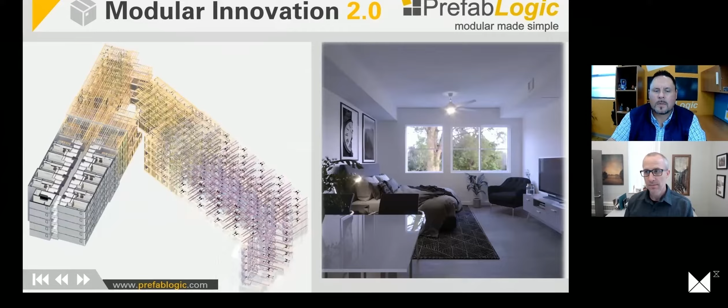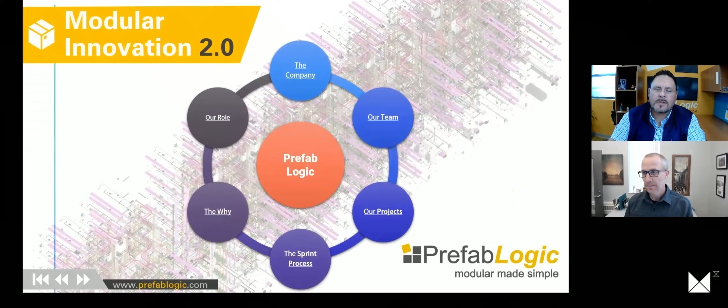So modular innovation for us, for an intro, we're going to talk a little bit about our company today, our team, our projects, the type of product that we heavily focus on, our proprietary sprint process, the why we do what we do, and how we play a role in the outcomes.

Our mission as a company really is defined into four very basic things. It's compression of time, the amount of time that projects rest in the pre-construction phase. It's reducing project expense, both during the pre-construction phase, during the manufacturing process, as well as that modular integration into the site. We'll talk a little bit today about how we accomplish that.

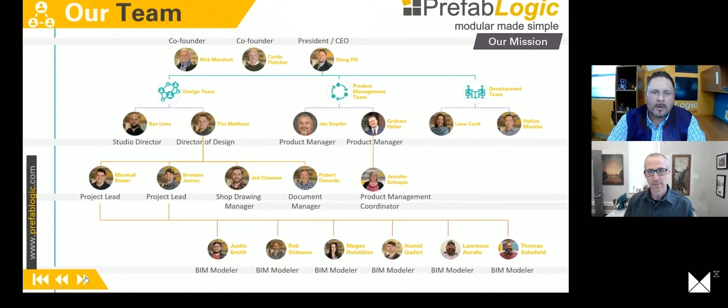Also to deliver highly coordinated products to our manufacturing partners and our general contracting clients, as well as to drive the modular industry forward through technology creation and innovation, some of which we'll see today. A little bit about our team. As I mentioned, Rick Murdock and Curtis Fletcher are co-founders. Myself, Doug Pill, I run the design team, product management team, and the development teams.

In terms of types of projects that we work on, it could be classified from a high level as high density products, whether that be type 3 or type 5, of course, wood frame product, but in the affordable housing space, market rate housing, senior assisted living, workforce housing, student housing, and also hospitality. Up into the pandemic, we had quite a number of hospitality products that we'd worked upon, but due to COVID, that's slowed down a little bit. But I think we see some headwinds on the horizon for us in that particular area.

So one of the things that we're going to focus on today is our proprietary sprint model process. Historically, it was not uncommon for projects to rest in the pre-construction phase in the modular industry for 12, 15, 18, 20 months, maybe even longer. And even with that time frame, the product delivered to the manufacturing partner wasn't optimal. It wasn't integrated or coordinated at the level it needed to be, which caused manufacturing inefficiencies, delays, and oftentimes product actually being built offline out in the yard. With our proprietary sprint process, we've eliminated that.

What we're looking at here is a very high level of our sprint process broken down by sprint by client. As you'll notice, the blue scopes across the top, that's the developer scope. That would encompass sprint 1 and sprint 3. Sprint 1 is really about getting the product designed and detailed from an architectural and specification perspective that allows us to define that line in the sand, which we'll see in just a few minutes, giving all stakeholders clarity on what's actually going to be built.

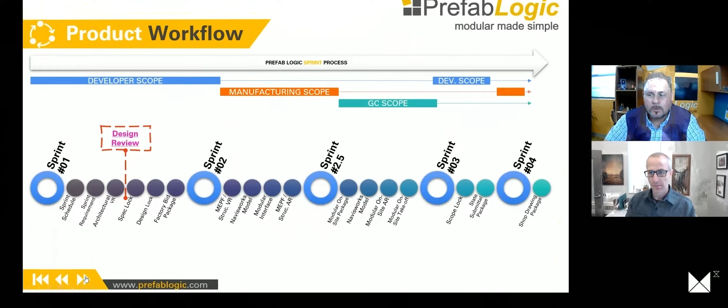Moving on into sprint 3, as I mentioned, that's the state submittals package, that's the development scope, and then sprint 4, wrapping up from a high level, that's the shop drawing development, production, and distribution package.

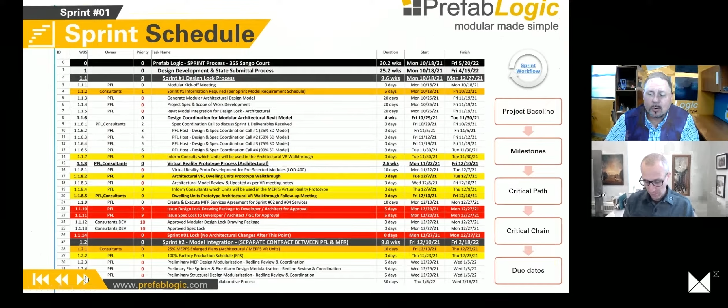And the accompanying document to this, which we produce for every project, is what we call our sprint model requirement schedule. And this is just a snapshot, high-level overview of it. But what this does by discipline, architect, developer, general contractor, manufacturer, PrefabLogic, structural engineer, all of these stakeholders that are involved in the pre-construction process, from the moment that we kick off a project, if we reference back to that 10/18 date, they'll know by sprint and by day what deliverables are due, and we drive to that process. And so PrefabLogic, not only are we the architect of record for everything modular, but our team actually drives through the sprint process for congruency, constructability, feasibility, all the way through, okay?

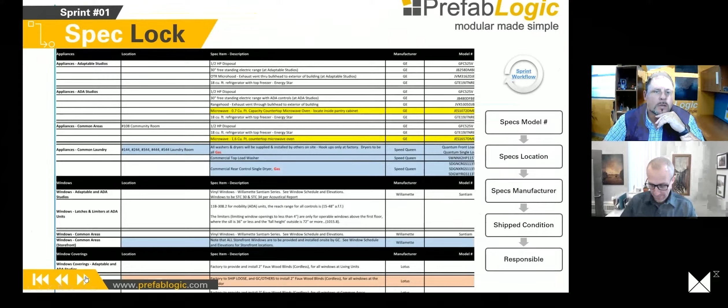Moving into, at the end of sprint one, we actually get to spec lock, and this is a very robust package that defines by room. There's some generalities in this particular document, but by room, whether that be a dwelling unit or a common area, boiler room, electrical room, low volt room, everything that's going to be purchased and installed in the modules in the manufacturing environment.

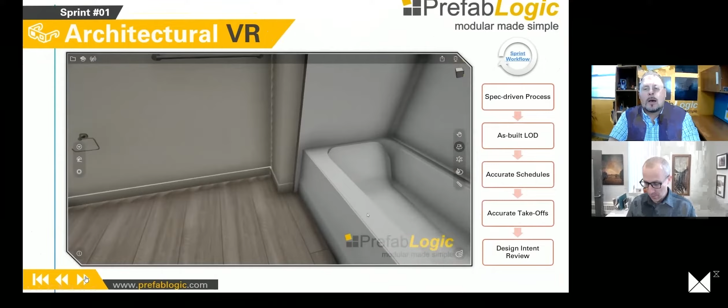Well, as we mentioned before, Ryan, we'll get to a point where roughly 5 weeks in, we will bring all those stakeholders together and give them a visual representation of our work product thus far. And I say this is a visual representation because the truth is, this is a very data-rich environment. Every component that you see modeled here is actually modeled to spec. There are no placeholders in this architectural model, meaning the faucet that you'll see there, the cabinets, the appliances, the receptacles, lighting, everything is actually modeled to spec.

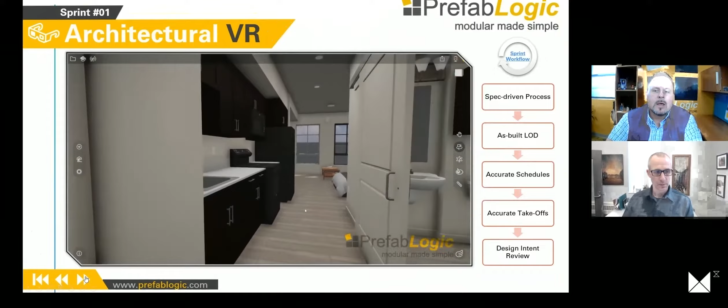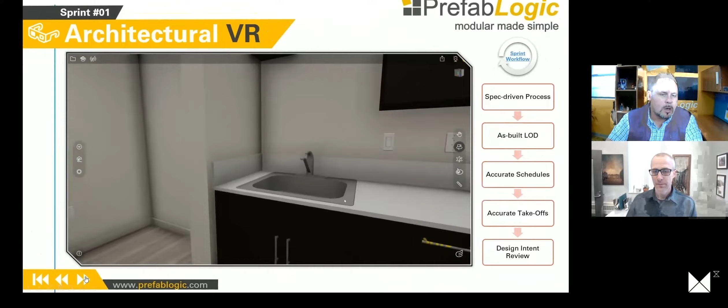And what that allows us to do is not only provide this very robust, comprehensive visual representation of what's going to happen, but it allows us to actually start extracting data very early on in this process for our manufacturing partners. An example, the door hardware, we'll know who the manufacturer is, what the model is, all of those data points, colors, that we can begin extracting literally, let's say 70 to 80 days into the project, so they can start getting ahead of that procurement cycle.

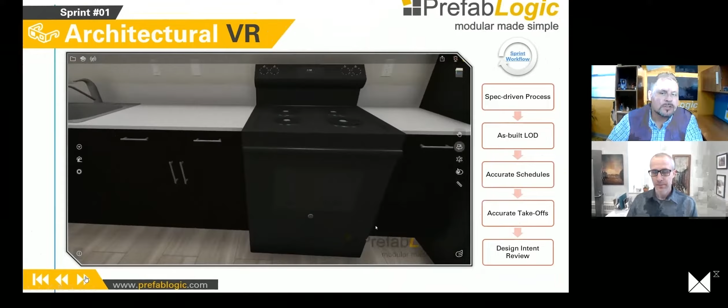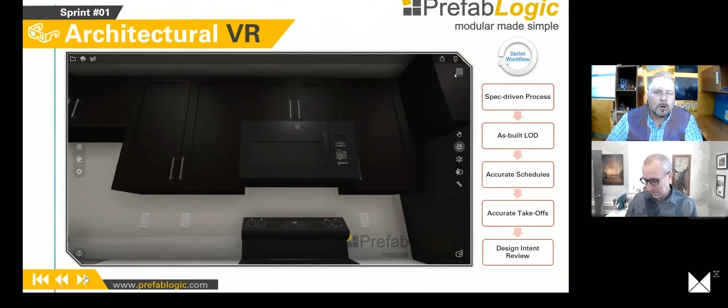Everybody knows procurement's a challenge for builders and modular manufacturers, but when you lay on top of it the supply chain issues that manufacturers and builders are facing today, the earlier we can get that information to them, the far better the project goes. And we're in a position today to be able to provide this information literally 80 days after we kick off a project.

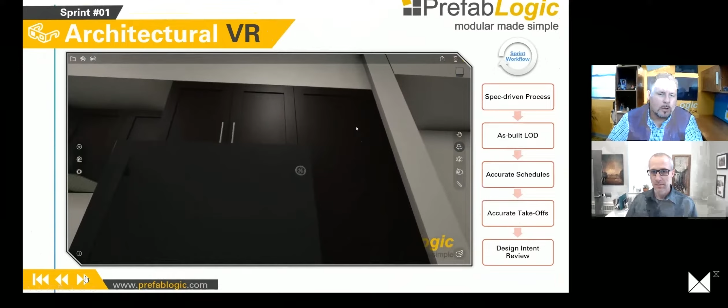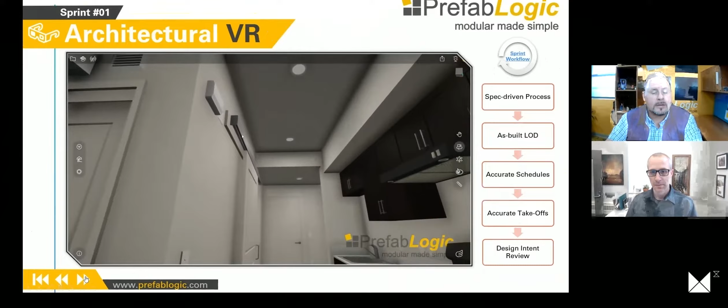So the intent for this originally was to give all the stakeholders the ability to make final changes before we proceed into sprint 2, because the sprint process is progressive. We don't go from line 7 in sprint 1 to line 8 until line 7 is done, because it ensures that we're all but completely eliminating rework and everybody's congruent in the status of the project. Does that make sense?

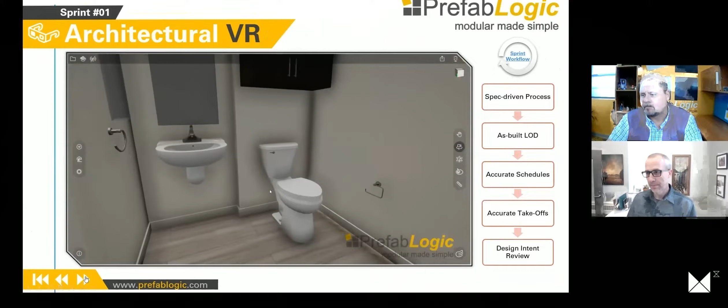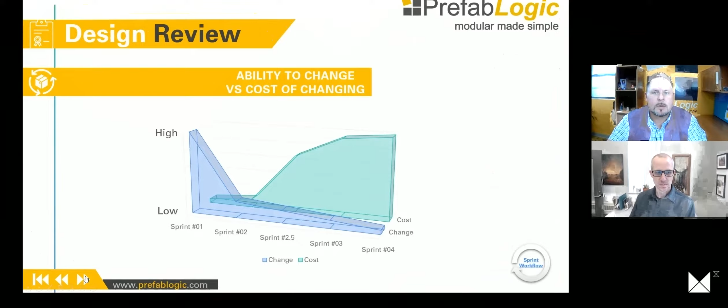At the end of the architectural review, we'll make any changes that have been made by the development client or the interior designer or the architect, and we'll produce a very robust deliverable. We call it our client approval package. And in this particular package, anything that has been designed, defined, or specified will be produced in this document. And it's roughly about 80 pages, depending on the project, but it'll provide overall 2D and 3D plan sets and enlarged 2D and 3D plans.

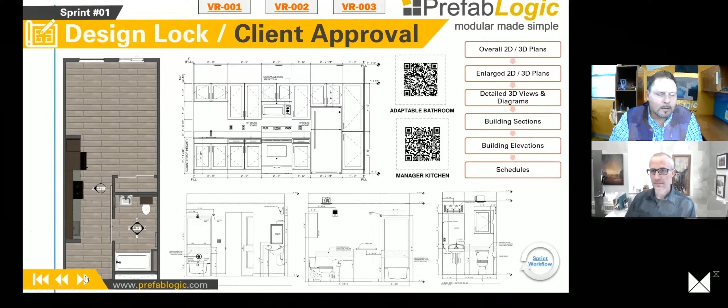You see the floor plan here on the left-hand side of this screen, the detailed 3D views and diagrams, cross-building sections, elevations, and schedules. One of the things that we had been requested to do by some of our clients is, as much as they appreciated the architectural virtual reality review that we do 45 to 50 days in from the time we kick off a project, they needed something memorialized that ancillary stakeholders could utilize, whether that be leasing agents or lenders or other investors that didn't have the ability to access the virtual reality environment.

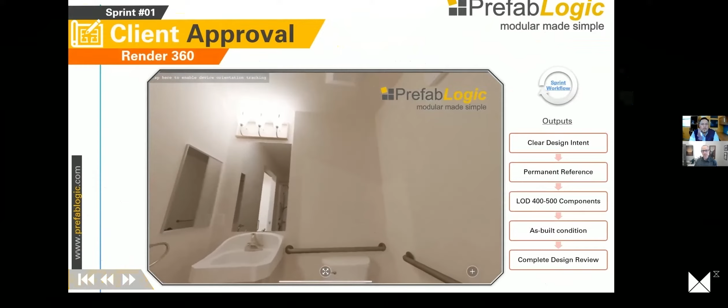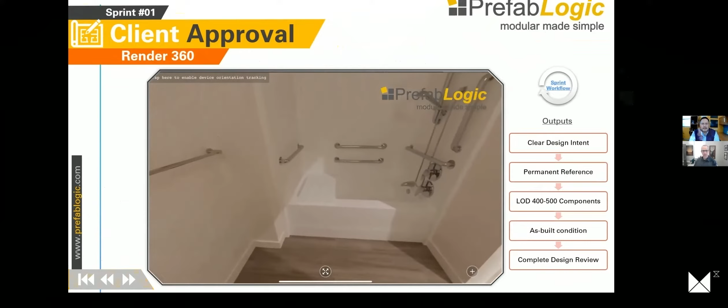And so we created an application that allowed us to provide that to them. And it's a Render 360. So anything that has an elevation in that particular building or in that dwelling unit, we provide Render 360s for those folks to actually leverage and utilize as a tool. Think about having a leasing agent on a particular project that can access this, 60 days in from the time that we kick off a project. Their leasing strategy changes. How they market this product changes.

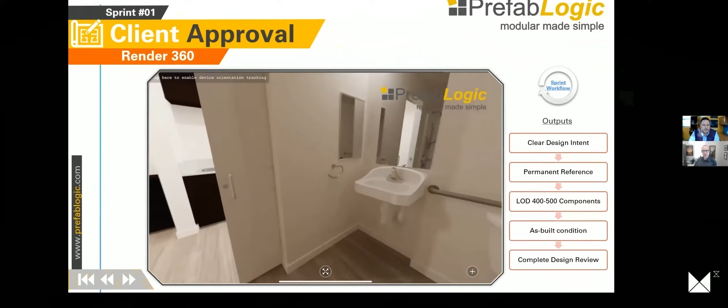Now, keep in mind, this is a static image. There's no data behind this environment here. It's all static, but it's 100% clear, accurate representation of what will be done, what those units will look like.

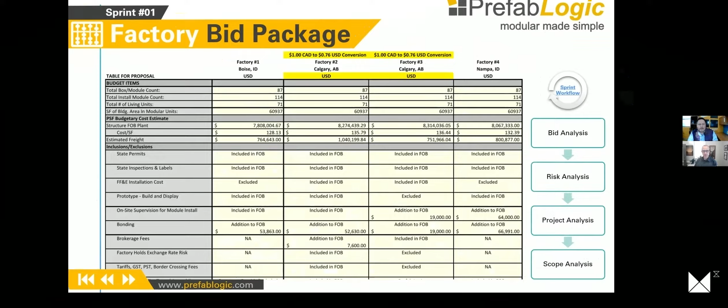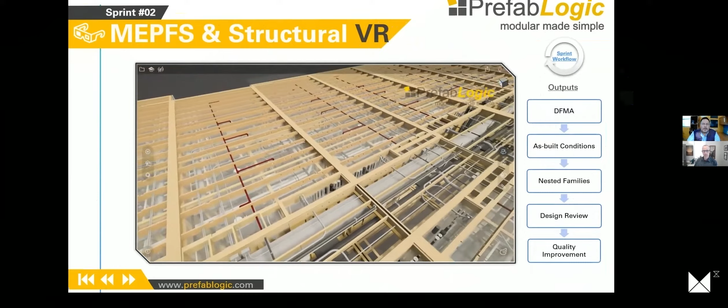We have a number of sprint processes that we go through today. One would be sole sourced, where a manufacturer brings a product to us and we begin our process. If it's a traditional sprint process, one of the services that we provide is we can compile all this information, we produce the bid package, and we begin sending that out to our manufacturing partners for them to bid on. Once we get that wrapped up and the manufacturer is selected, we'll go immediately into Sprint 2. This is a separate contract. This is actually a contract and deliverable for the manufacturing partner.

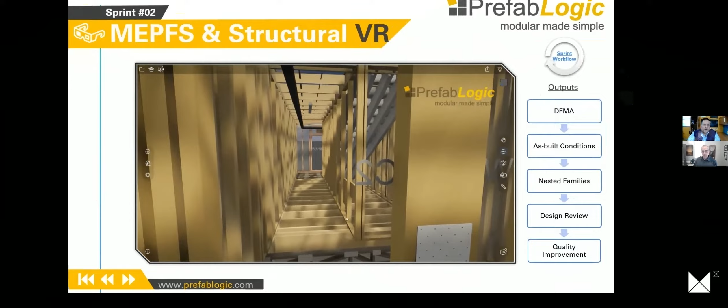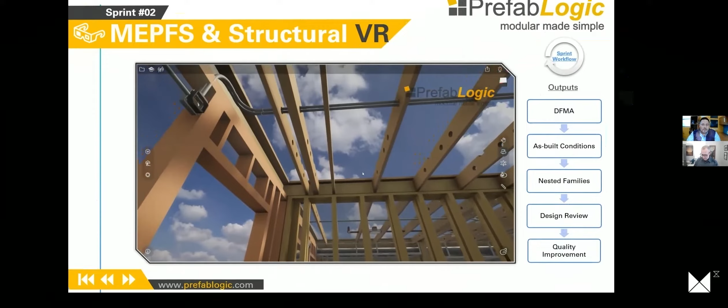What we're looking at here, Ryan, is we were flying over level 1 of the particular building. But as you can see, everything is integrated to spec. And just like in the architectural model, there are no placeholders in this environment. All of the data that we can extract out of the architectural model, we can also extract for our manufacturing partner, whether that be dimensional lumber. If they have automated saws, we're feeding to them where they're running dados, how big those dados are, thick, wide, and dimensionally, where all those holes need to be drilled in the roof joists.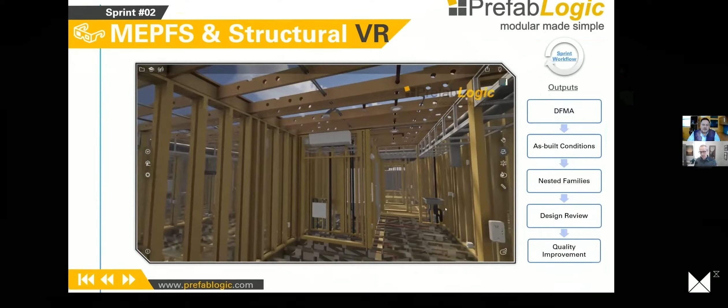How much conduit they would need to build this modular, to build a level, or to build a building, or to build an entire project. All of those light fixtures, everything in there that you're seeing represented visually actually has hundreds and hundreds of points of data behind it that allows them to get ahead of this.

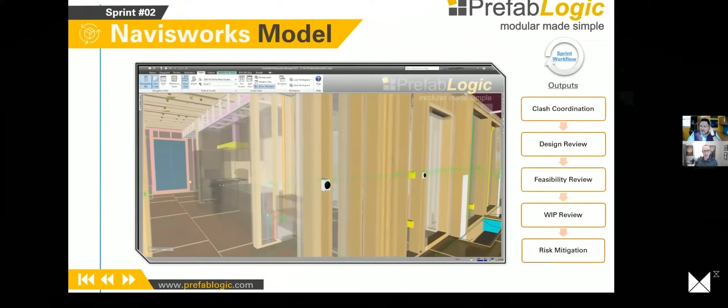The next thing that we do during the process, and it actually provides part of our QA/QC process, is Navisworks. And many people have heard of Navisworks. And if I talk to 10 of them, 5 of them tell me it's okay. 5 of them will tell me it's pretty good. And what we found is, depending on the level of development that you're integrating to, everything that we do for our manufacturing partners begins at about 400 and ends at about 500 in terms of LOD.

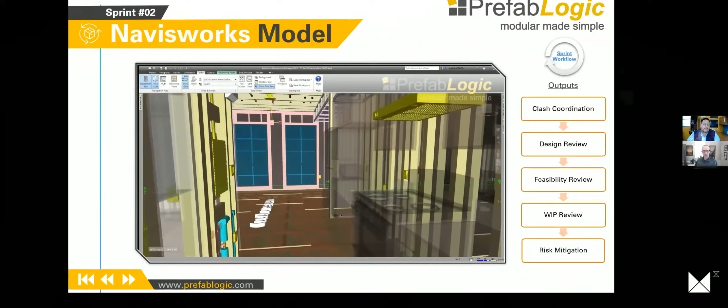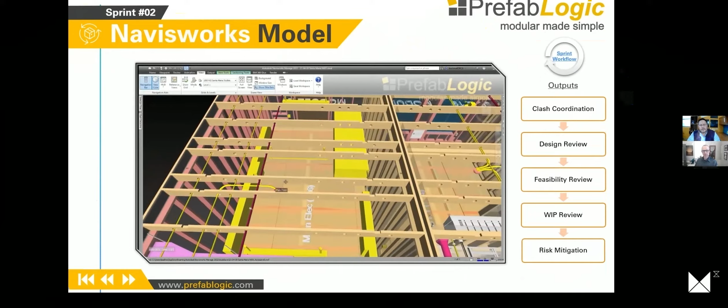We actually not only get to extract clash detection out of the Navisworks environment, we also get to ensure that we're executing constructability and feasibility in our digital twin, because that's really what we do. We produce a 100% accurate digital twin of what would be built in the manufacturing environment digitally. As an example, all of those ducts, all of the exchange units that you see there in that Navisworks platform, that's 100% modeled to spec. As I mentioned, there's nothing in there. If we were not modeling to spec, we would not have the ability to determine constructability and feasibility in this environment.

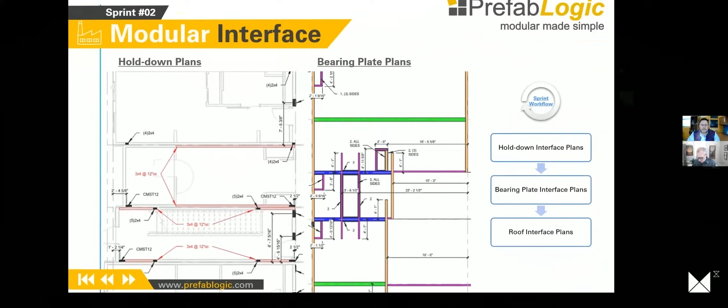Modular interface plan, that's part of our deliverable during Sprint 2, interface between modules and podium or foundation.

The next deliverable that we're going to show you here is actually an augmented reality environment, and this was really developed for our manufacturing partners to improve coordination in between everybody, all stakeholders on the manufacturing floor. It's integrated into our BIM model. It allows for live measurement. So if a QA or QC person is within that environment and they want to check dimensions between the end of a cabinet and the end of a wall, they can do that within this environment here.

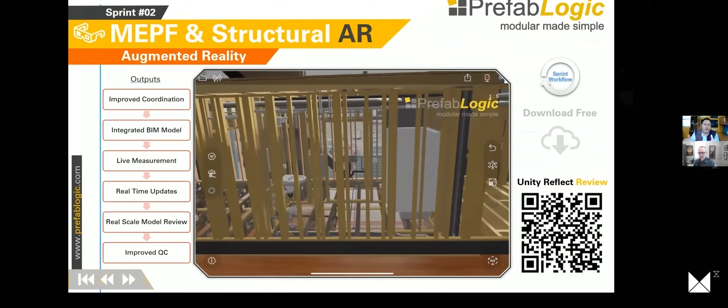Okay. It also allows for real-time updates. Now, this is scalable in any scale that you want. We've actually taken a particular module and placed it on our conference room table. If this was a 1-to-1 ratio, it would have been 74 feet long, wouldn't have fit in this environment.

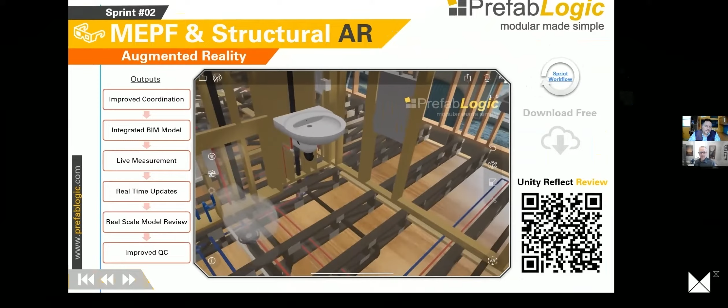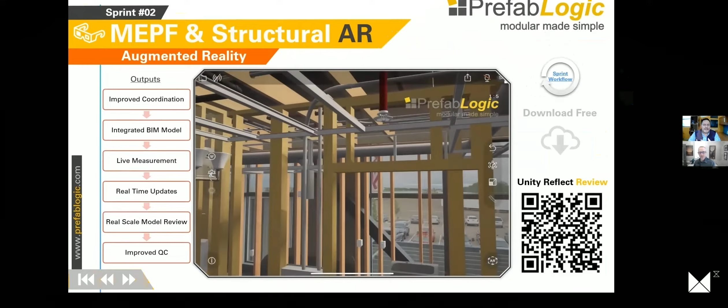But you can, in your iPad, open this up, enter from the corner of a module, open that module, and be immersed in that augmented reality environment. As I think I mentioned, this is real-time updates. So if something's updated in the Revit model, it will automatically update into this environment here. And ultimately what this does, besides collaboration and coordination, it improves quality control and quality assurance for our manufacturing partners.

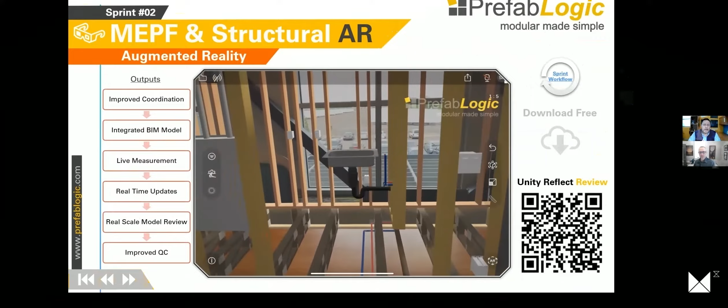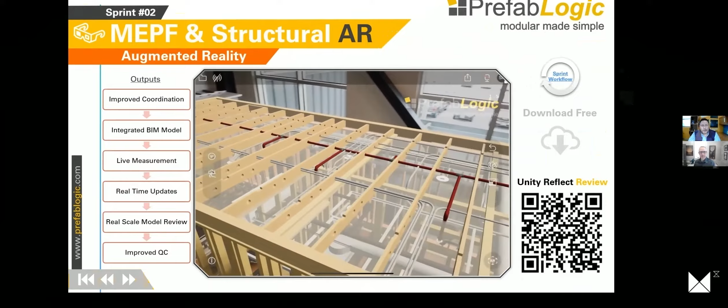Now, a couple of unique things that we built into this environment is that if you're a QA or you're QC, or let's say you're someone out on the floor that you're actually framing or you're installing electrical and you just want to look at electrical, you actually have the ability to begin turning off and turning on in that same environment, never leaving the environment. You can toggle on and off all the disciplines that you want to see or toggle off the disciplines that you don't want to see in the same environment.

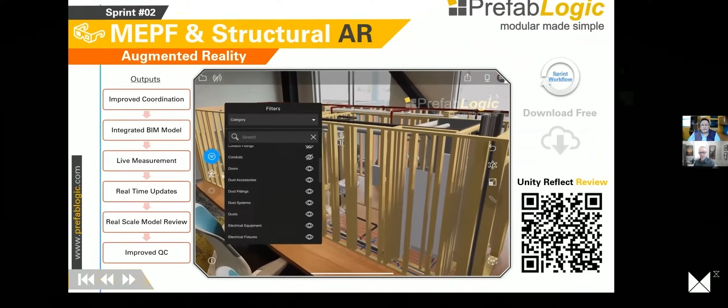But from there, let's spend just a moment talking about Sprint 2.5. And historically, what has happened in modular construction is a manufacturer will get done with the modules and they'll celebrate. Heck, they might even have a barbecue. And they'll wave at those last modules going away, heading down the road to the job site. And the general contractor and ultimately their sub-trades are the ones left to try and figure this thing out.

And some manufacturers say, hey, bring your sub-trades up to the plant. Let's spend some time. We'll educate them a little bit. But oftentimes that happens long before the manufacturing process. Even if it happens congruent with the manufacturing process, once they get back down there on the job site, if it's a 150 or 200 or 400 module project, the level of retention and their ability to execute upon that is lost quickly. And so we've developed what we call Sprint 2.5. We believe today it is the industry leading modular on-site completion package deliverable that's out there.

And so when that particular boiler room, that module gets set down there on the podium, if you will, what's going to happen is they then have to try and figure out how to get that boiler room installed. We've taken all of that off their plate, whether that be chases, boiler rooms, low volt rooms, community kitchens, community laundry rooms, mail rooms. It doesn't matter. Anything that's going to be completed in those modules once they arrive on site, that's actually coordinated and integrated to the same level that we do for our manufacturing partners.

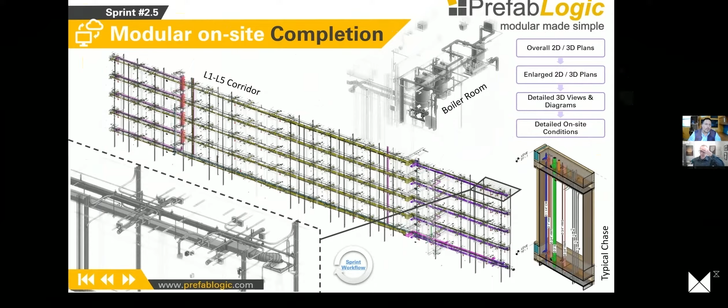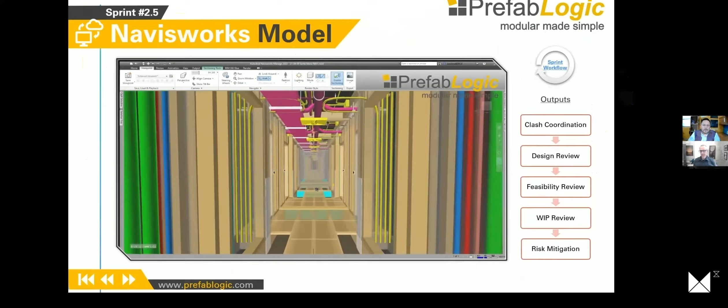One of those deliverables happens to be the Navisworks model. So the general contractor and their sub-trades can enter this Navisworks environment. This is part of the deliverables I mentioned, and identify and coordinate chases, anything that they might need to do. But we've taken it even a level further beyond that for coordination. And ultimately what we've done is we've created that augmented reality environment for Sprint 2.5 as well.

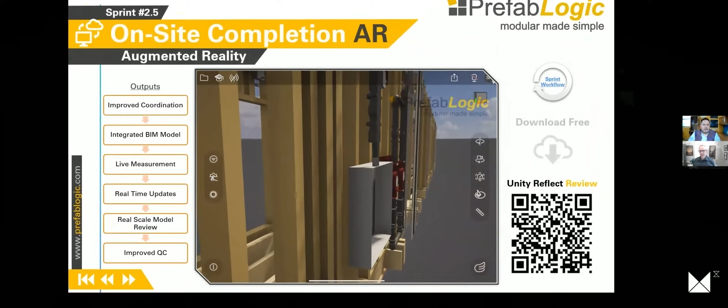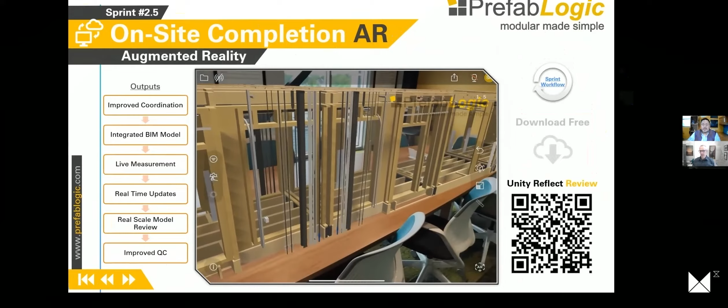And what's important about this, Ryan, is ultimately, if you've got a superintendent that's sitting on the job site and he has a sub-trade, maybe the young lady or the guy that's installing mechanical in this particular corridor or the boiler room or whatever it might be, isn't on the job site, they can actually go into their iPad and they'll see an avatar, and anywhere that super is looking in that environment, the person that's in that same environment will see where he's looking as well.

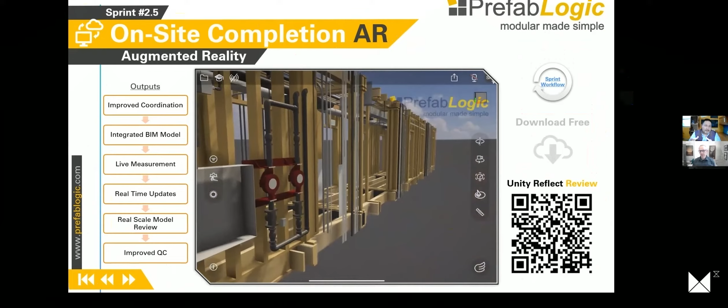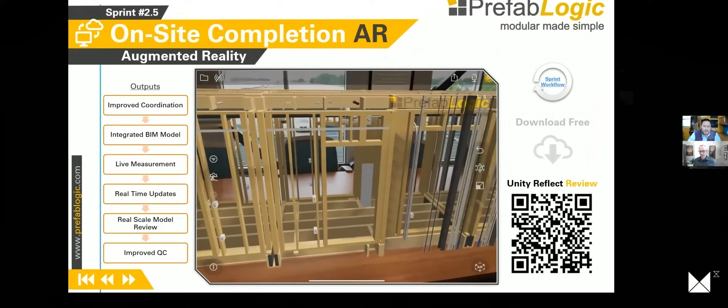Okay. Ultimately, this is a free service in terms of accessibility. We pay for the development license. One of the reasons that we went with Unity was once we buy the development license, we own that environment. Whether there's one stakeholder or 250 stakeholders that need to access this in the field, we can grant them access for utilization.

Out of this deliverable is also a materials takeoff, and that's done by discipline, mechanical, electrical, plumbing, anything that would have to be completed on site. We can do that by level, grand totals of the project. This drives down cost management and improves data integration. So out of this CSV format that we'll provide as the deliverable, the general contractor can then go in and provide their costs. So they'll know long before this project ever comes what it's going to take in terms of a budget to complete it in terms of materials.

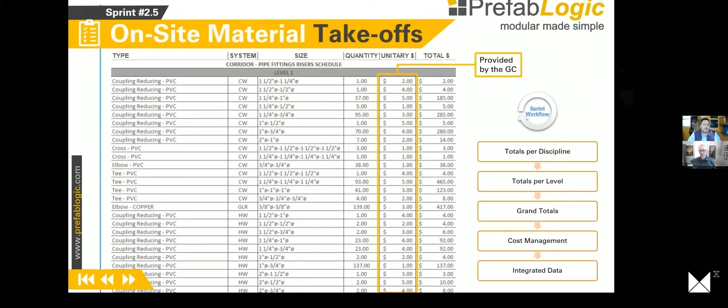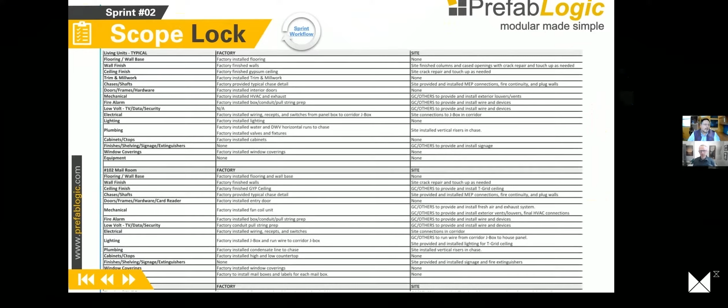During Sprint 2, we'll actually get to a scope lock. This is another service that our product management team provides. And so we will define everything that's going to happen with those modules, who's going to be buying it, where it's going to be installed, and who's going to be installing it, long before those ever get into production.

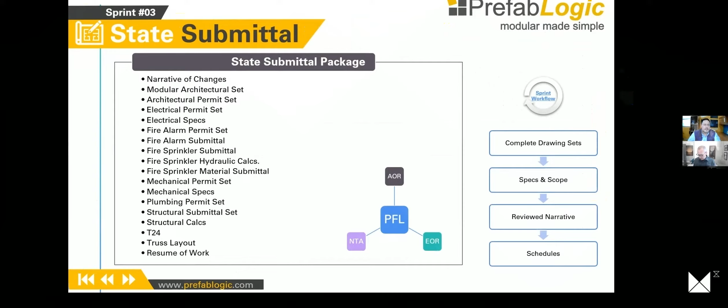And so beyond that, Sprint 3, as I mentioned, that is a development client scope. That's where we generate out of our work product our state submittal package. We manage it. I think I also mentioned that PrefabLogic is the architect of record for everything modular. And we'll submit that to the receiving state or third-party plan review agency, manage through that process until we have stamps from the state.

At the end of that, the last one is shop drawing production. Many of our manufacturing partners today are paperless in their environments. And so we're either producing and distributing these via digital media or prints in PDF format that they can produce and work off of in their production environments.

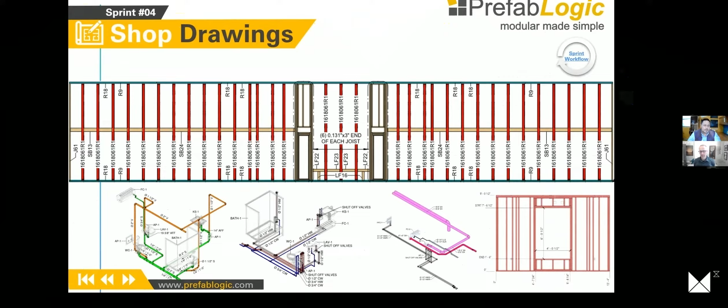Ryan, that is a very quick high-level overview of PrefabLogic. Traditionally that's been extracted out of about a 2-hour conversation. I think we did it in about 25 minutes. So what can I help you with in terms of questions, my friend?

Yeah, so our audience, fortunately, many of them are familiar with the modular industry and will know what you're talking about. But what I find fascinating about your presentation, Doug, is in many ways, PrefabLogic has emerged from a project delivery context in the United States, in which we're using traditional contracts and traditional delivery systems. And once you go to modular, it starts to present some wrenches in that. And you've been able to come in and say, we can fix that, and we can expedite that. Whereas the traditional players and stakeholders aren't able to do that, right?

The architect of record, the general contractor who's handling the boxes, and then of course the manufacturers themselves that probably should be moving more in the direction of services, but they're kind of unwilling to. They just want to stay with the product itself. So I just wondered, in light of all of that, PrefabLogic certainly has been instrumental in California projects and moving along multifamily and hospitality and educating these teams continuously.